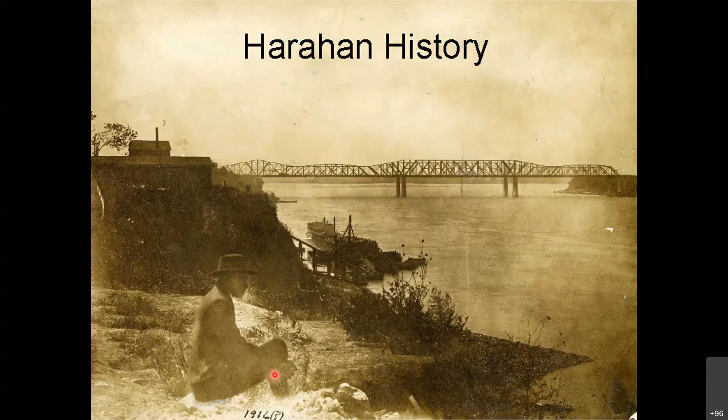This is a historical perspective—pictures dated about 1916. You're on the Tennessee side, looking south, and you see the two bridges. The bridge we're talking about, the Harahan, is already complete; it's the bridge closest to us in this photograph. The one behind it is the Frisco Bridge.

Here's the Frisco Bridge. It was built quite a bit earlier, in 1892, and at the time was the third longest bridge in the world—amazing when you consider its length is just about a mile over the waterway proper. It was owned by one railroad and was a single track bridge, a very busy place. They said before this bridge was built, it took 2 weeks to get a train across the river. They'd roll the cars down long inclines on the Tennessee side, put them on a barge, float them across the river, and reassemble the train.

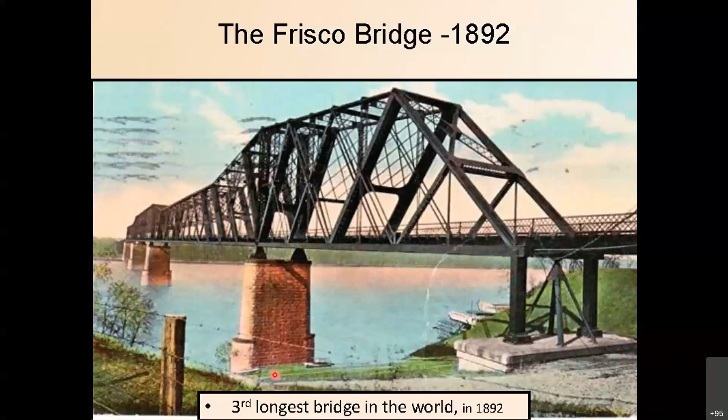Even with the one crossing, by 1910 it was getting crowded again. There were now 5 railroads coming into Memphis and 2 coming into West Memphis. Frisco had a monopoly, and a bunch of other railroad companies formed a group and decided they wanted a second bridge across the river at Memphis.

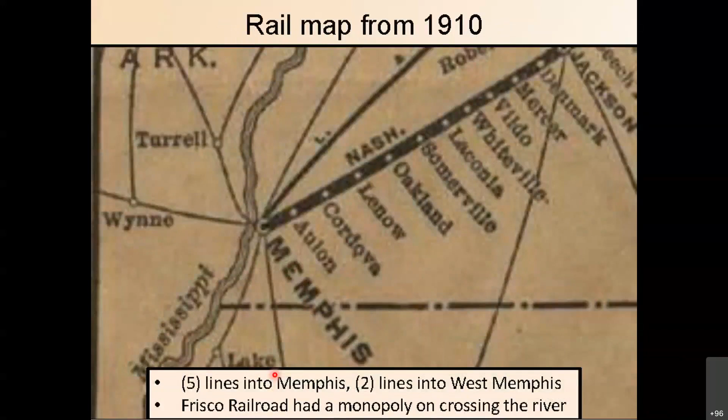By the way, this bridge will have—what happened? Page down is not working here.

Well, oh, there we go.

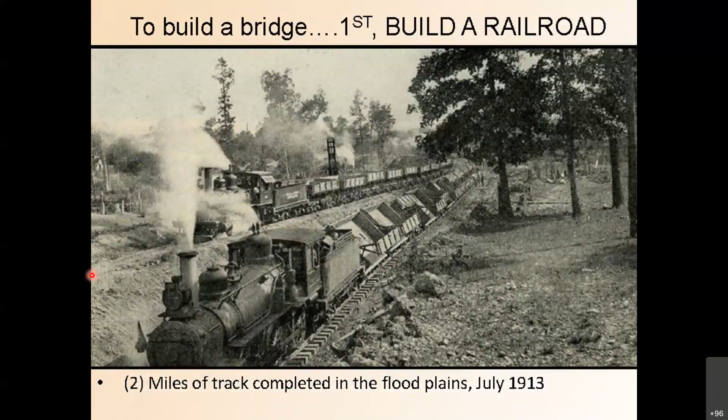The first thing they did when they got the commission to start the project was to build a railroad track. They needed 2 miles of track to get from across the floodplain in West Memphis to the edge of the water. This work was started in July of 1913, so they got the project approved and the track built in 2 months. I can't imagine those dates are complete - either that or Mr. Modjeski had started designing the bridge before he got the assignment. Anyway, here's what he was trying to do. Let me get my pointer up here for you.

Here's the railroad we were just talking about. It came off existing tracks, came across the floodplain, terminated at the water's edge. There's a pier they built there - the foundation of that pier is still there, you can see it today. Here's the bridge on the right-hand side; the upper right-hand side will be the Harahan, the Frisco is down below it. They're similar lengths, and of course their substructures had to line up because we're in the river - we couldn't have piers that were not aligned to each other.

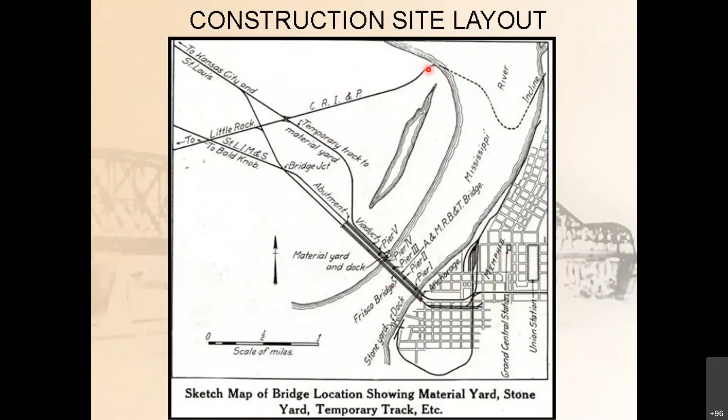And then you see the rail yard going into the city where all the train stations were, down in this area. One interesting fact - even when this map was drawn, you see this incline up here in the upper right corner? That's one of the inclines to get the trains down to water's edge, and then brought them across to the Arkansas side of the river, reassembled the train, and continued to the west.

So we're going to go through a couple of these historic pictures. They built 15 barges in 3 months to build the bridge. They needed 21 barges in total.

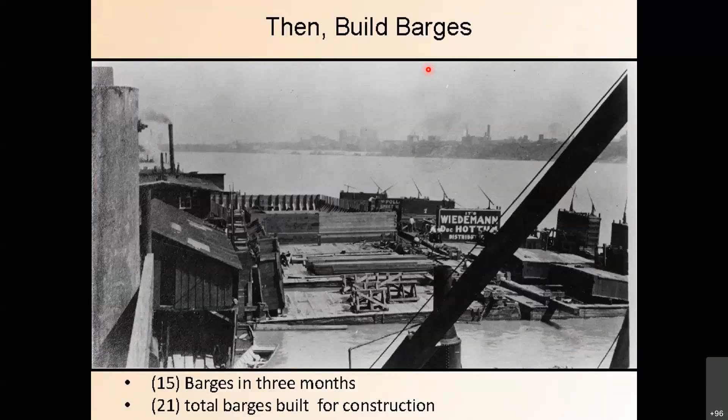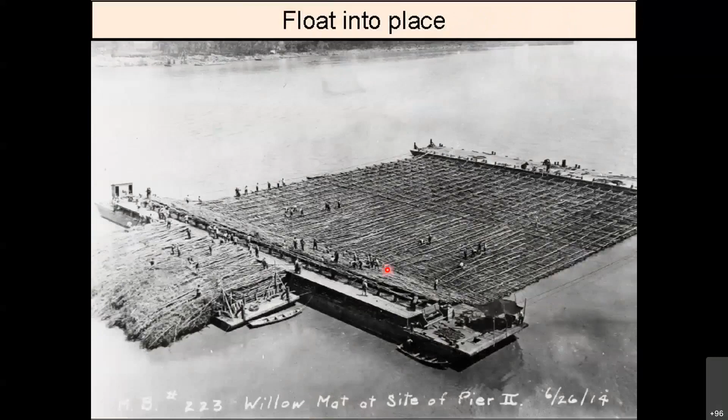You see the laborers are constructing willow mats that are going to sink to the bottom of the river. This is a different picture of it, assembling the mat. You get an idea of the scale of this thing when you see the workers and the boats around them, and the finished product. Now we're moving it into place.

There's pier number 3 - again, we're working on pier 2. The mat is being brought in. This picture is probably taken from the structure of the Frisco Bridge itself. They're getting ready to sink the mat into the ground.

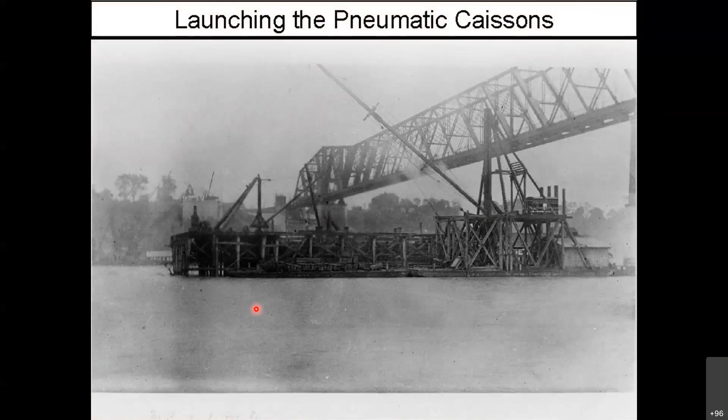The bottom of the river is a very fluid environment. It is not stationary - there's something called bed load and something called suspended load. Bed load is the river dragging the bottom of the channel, if you will, down to New Orleans. It is a very dynamic situation. The purpose of the mat was to keep the river from moving around the foundations as they constructed it.

If you want some more background on working under the water on the Mississippi, I would suggest a book called Rising Tide by John Barry. It is a great read - it actually gives you quite the history of the Corps of Engineers and the Lower Mississippi River Commission, and all the bridges, and James Eads. It's a great read - it'll surprise you what they had to put up with.

Anyway, they got the mat in the ground - it's been sunk. They're now starting to install the pneumatic caisson. These are big steel boxes, stone boxes, 4-sided, 5-sided box. They got the lid on the top, the bottom is open, and they start digging their way down. Here's another picture of it, getting positioned.

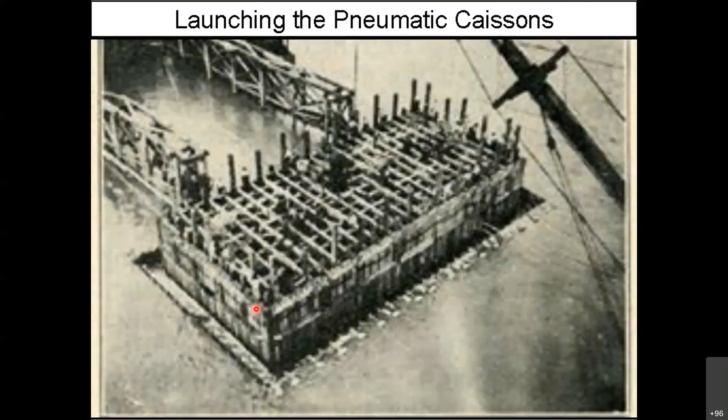They dig their way through the river bottom. They put men in the bottom of this thing - sand hogs, they call them. It is under pressure, they dig out the material, and it is lifted through a series of air locks out of the top. And as this thing sinks into the ground, they build the pier on top of it.

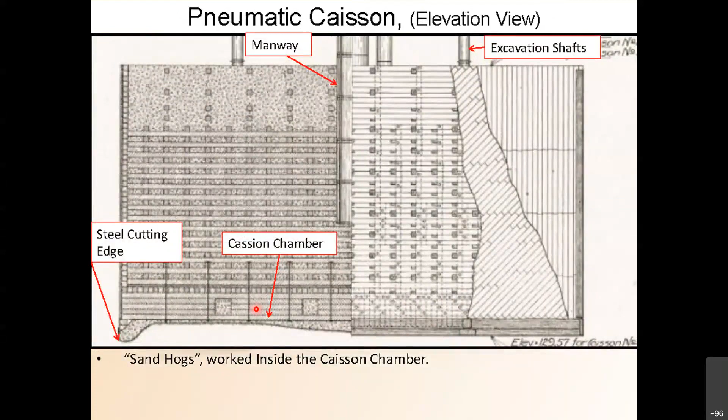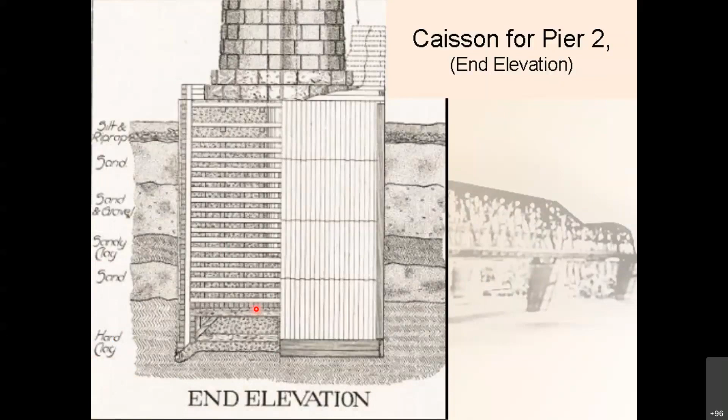Now, these drawings come right out of the Harahan construction plan set - these are the things that Modjeski's firm actually produced. You'll note there's no rock at the bottom of that pier - there's no rock in this part of the state of Tennessee. It's 1,500 feet down; they went down to good hard clay. I do not have the elevation, but it's quite deep into the sediment of the river. And then the stone pier is coming out of the top of it. This again is pier number 2.

One of the anchors, or piers—pier number 1, on the Tennessee side—was not meant for compression. It was meant for uplift. I'll show you why in a minute, but look at the statistics across the bottom: almost 11 million pounds of dead weight designed to withhold a 7 million pound pull.

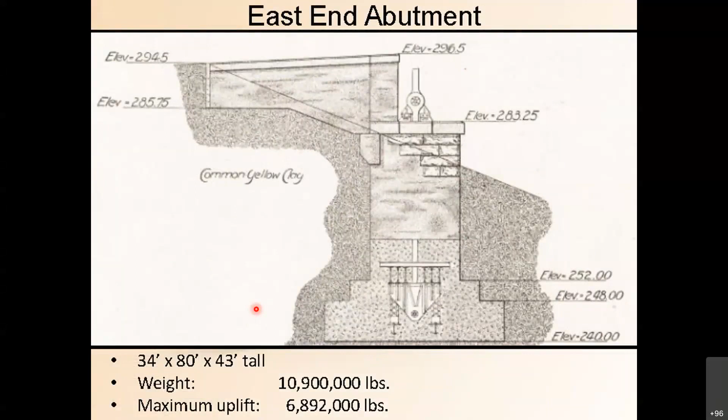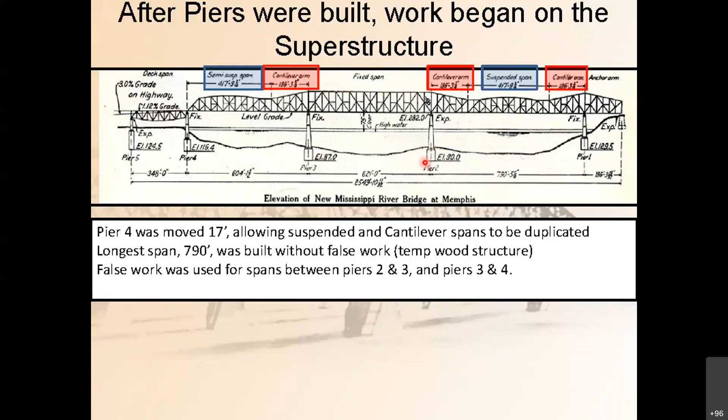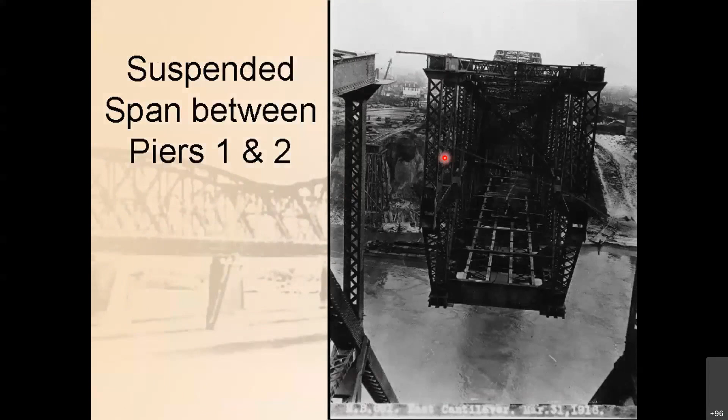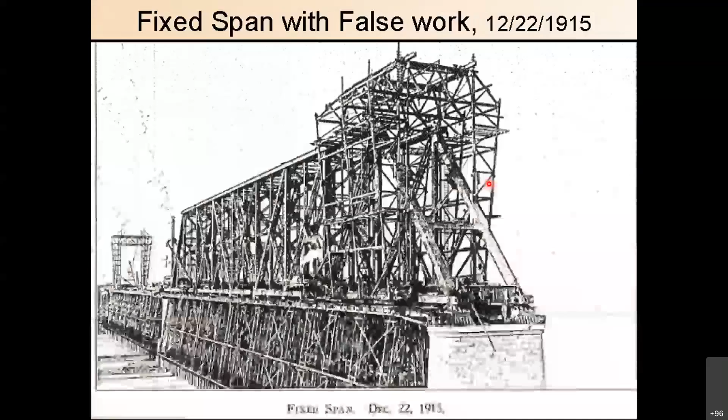They're working on getting ready for the suspension section. Here it is—they're making the connections. They lifted it up and they're putting it into place. Here's the false work between 2 and 3, and then there's the stone here for number 3, and then there's the false work between 3 and 4.

You can see, and this looks to be a rendering to me, the superstructure of the truss in the background getting put together. But we're in the river.

We had a problem in 1915—a big flood came through and we lost all the false work between the piers. You see it's knocked out. It knocked the span 8 inches out of alignment that was already constructed. Totally destroyed between piers 3 and 4.

Pier 2 is in the background. Between 2 and 3 is here. Between 3 and 4 is here. We lost all of that false work and the superstructure that had been constructed—had a pile of rubble.

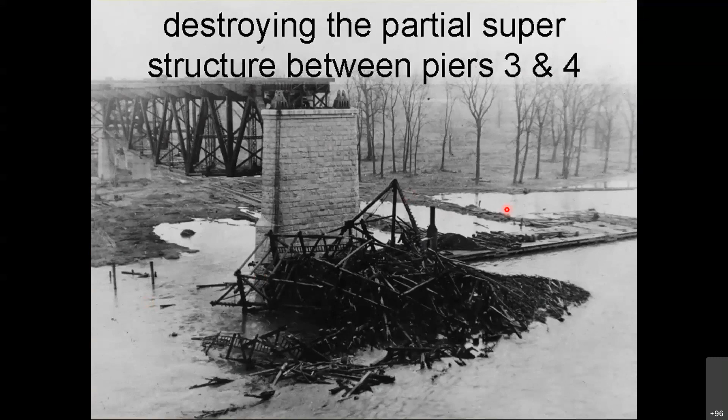Here is the dock I mentioned earlier. The materials were brought out on that dock. Remnants are still there, believe it or not.

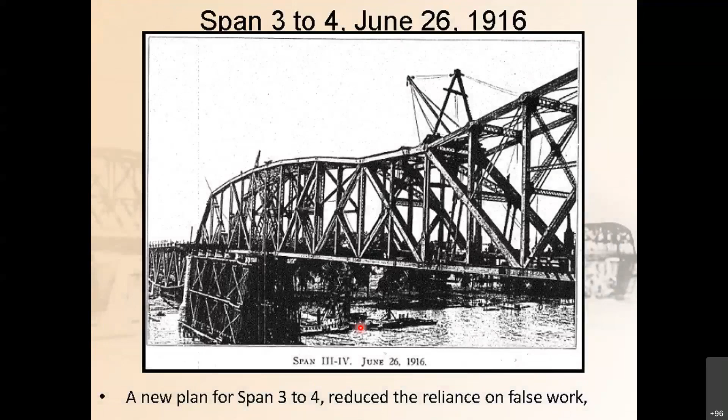They redesigned it a little bit so they had less false work, came back, and rebuilt all the pieces that were missing. In July of 1916, about 3 years later, they were done with the project for the trains, with 2 tracks on this structure. That's a construction period of about 3 years to build that bridge—from July of '13 to July of '16.

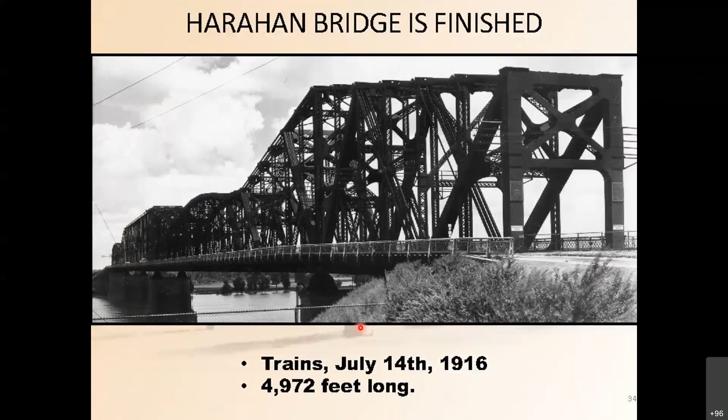About 14 months later, they finished what was called the wagon ways. At the time, there were about 1,000 cars in this part of the country, so traffic wasn't a problem, but there were wagons, actually illustrated in this picture. There was a wagon way on the north side of the track and a wagon way on the south side, one way in each direction.

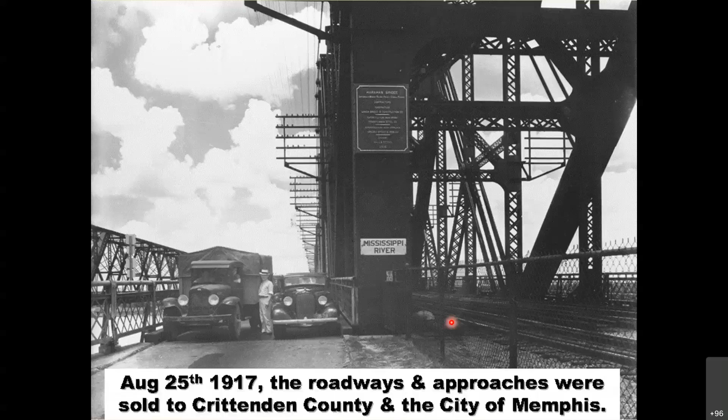On the 25th of August in 1917, a very significant thing happened. The railroad sold the wagon ways to Crittenden County, Arkansas, and the city of Memphis. They didn't do this out of benevolence. They were told to do this by the U.S. government as part of their permission to build the bridge. They would build these wagon ways and then give them to the local governments. That's a very important fact that made our project possible.

The wagon ways, converted to roadways, served as one of the very few highway crossings south of St. Louis until you get to New Orleans, until 1949. They did make the roadway a little wider. It was 14 feet when they started. They got it a bit wider, but it's still a pretty narrow way.

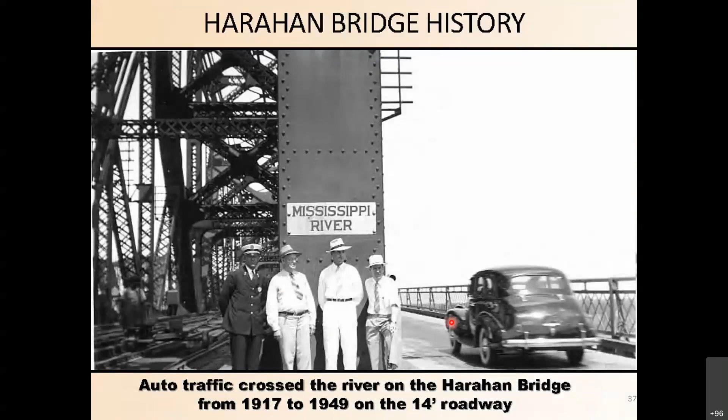That brings us to a more current time. In the 1990s and 2000s, there were several ideas to repurpose the automobile pathways. This whole idea of rails to trails was getting to be a bigger idea - that we would walk out and look back over the city of Memphis. The best view of the city of Memphis is from the middle of the river, looking back to the skyline. They tried several different ideas, but one of the biggest problems they always came up with was money and getting this thing going.

Well, one guy took this upon himself to make it happen - Charlie McVean. Interesting fellow. His father, as I understand the story, worked for the Corps of Engineers. I don't know that Mr. McVean Sr. was an engineer, but I think his background was there. But Charlie himself was self-made. He started McVean Trading & Investments, trading commodities.

He took it upon himself to get this project built for the city of Memphis. He's a railroad enthusiast. He's a philanthropist.

I've been in his office. He has a model railroad train running above all the offices on suspended tracks he hung from the ceiling. He puts GoPro cameras on the train and drives it around the yard, around the office from time to time. He's a nice fellow, got a lot of money, and he likes to share with what he's got.

Come to find out, he trades cattle. A lot of the cattle companies have offices in Omaha, Nebraska. The UP Railroad, who owns the tracks on the Harahan Bridge, has their corporate offices in Omaha, Nebraska.

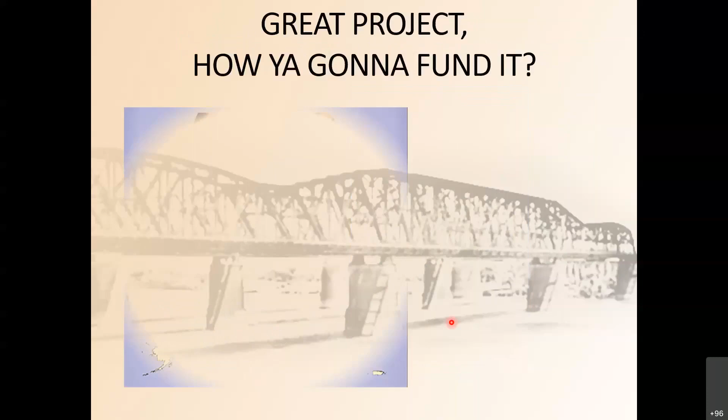Everybody got together. They formed a coalition of two governments, two cities, and a big project, and they decided they'd go for a Tiger Grant. Tiger Grants are extremely difficult and competitive. In 2012, there were 703 applications for Tiger Grants, with only 47 awards - a success rate of just under 7%.

Memphis got one, which is amazing to start with. Memphis got exactly what they asked for - $14.9 million. Unheard of, to get the amount of money that you requested. But we now had a project, and we now had money. So this is about the time I got involved in the project.

They got the grant application in March of 2012. They got the grant terms back in December of 2012. They had to have the design done by May of 2013 - they hadn't started yet, but they had to have it done in 5 months. And they had to be under construction no later than the end of the year or they'd lose the grant. There's no wiggle in that statement.

So they had a grand party, I understand, the day they got the award. And then the next day, in the hangover, they realized, oh damn, we've got to get busy. That's when I went and hired my company to start managing the project and start hiring the design teams and moving towards construction.

Uh-oh, wait a minute, that's not right. Wrong button. Hold on, let me get back to where it was. Hit the end before I got there.

Okay, so I was hired as a program manager. As I said earlier, this is the funnest thing I've ever done. It is not the most technically challenging, it wasn't difficult to get through, but it was more fun. It was a project that was very popular. There was no opposition, everybody wanted to talk about it. The media came out on a regular basis and wanted tours. I led people all over this place. Even before we opened it, we were going through construction sites with various PPE equipment. It was just a fun thing to work on, but it had some real challenges.

Client management, funds management, and record keeping were big deals I had to deal with up front. Client management, I had two of everything. I had the Federal Highway Administration, two cities, Memphis and West Memphis, two states, Tennessee and Arkansas, two county governments, Shelby County and Crittenden County. I had Tennessee DOT, the Arkansas DOT, and MATA for a portion of the project. And then, of course, the railroad, which is the 500-pound gorilla. There were a lot of people that wanted reports, information, and coordination. This was a difficult thing.

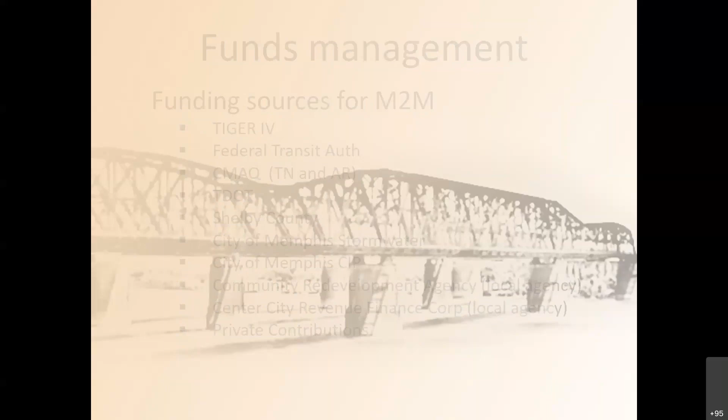Funds management - this is where I spent many hours every week. There are 11 lines on that screen, and each one gave us money, each with different sets of rules. Some you could use for design, some only for construction. Some you could use in Arkansas but nowhere else, some in Tennessee but only on one segment. Some of it was private money, and there were a couple of taxing agencies in there too. This is where I spent a great deal of time trying to keep the budget balanced or managed. There's $40 million on this table in this list of people, and they made it more complicated for me. There were 11 colors of money - that's the term we use, 11 colors of money.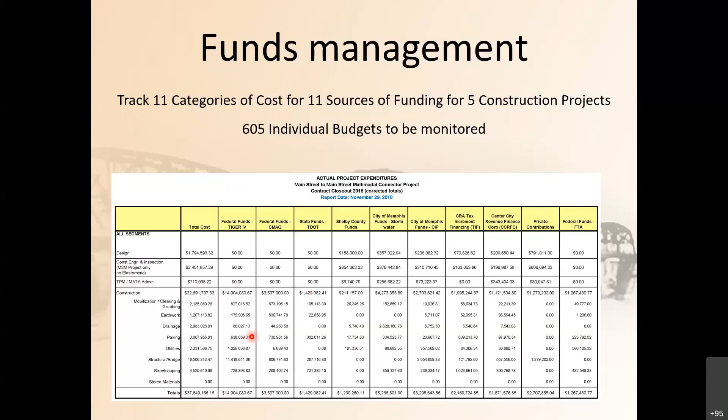They divided it into categories of cost - 11 categories total. 3 were soft costs: design, CEI, and program management. The other 8 were items of construction, which are down along the left-hand edge. Let me highlight that for you. On this edge I had to keep up with each one of those categories. And then I had 5 different construction projects going at the same time. So 11 times 11 times 5, that's 605 individual budgets. Now, a couple of them were zeros, but each one had a budget. And this is a summary - there are 5 more spreadsheets deep going into this. This was a lot of work. It really was.

Record keeping - TIGER grants are notoriously record generating grants. Quarterly reports, annual reports, regular federal highway project reports. The Bureau of Labor Statistics heard about our project, and I had to report to them every month how much money we spent and how many jobs we created. Of course, TDOT had their documentation. This was handled like a local project, so all the funding sources needed documentation, and then all the electronic and paper document retention policy. I did some checking - there are 30 file drawers full of paper in the storehouse here in Memphis, a quarter of a terabyte of data on jump drives, actually bricks, and 60,000 individual files being stored for this project.

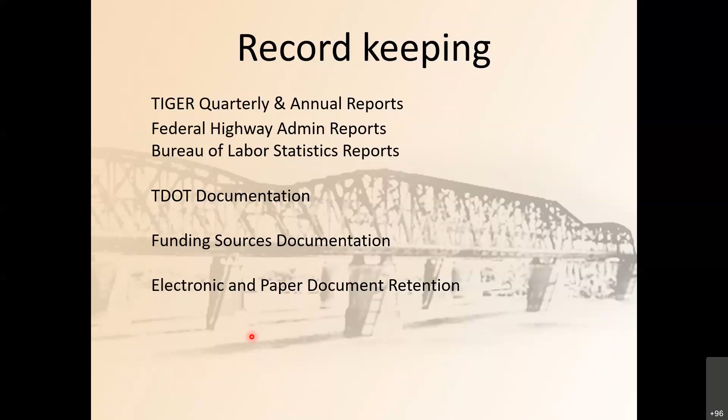Let's talk about what we started with. Now I'm going to start drilling down a little bit. This is what it looked like when I walked up there in 2012. Main to Main was a large project, starting up on Memphis Main Street on the right-hand side of the screen, crossing the river and going many miles into Arkansas. We're going to quit talking about everything except what we called segment 4, which is right across the river. And there we are - the blue line represents the walkway that was built under this contract. It's across the river.

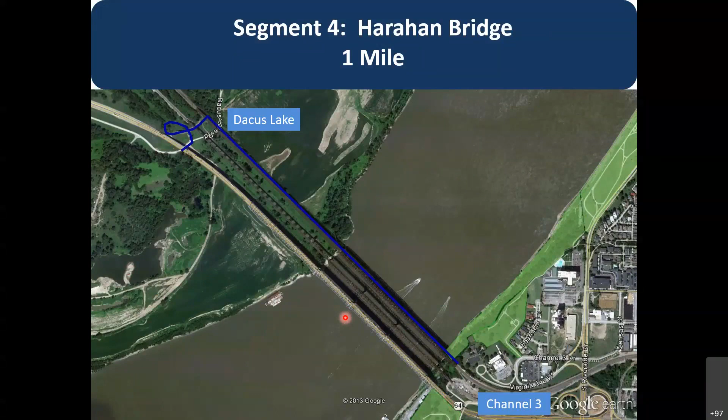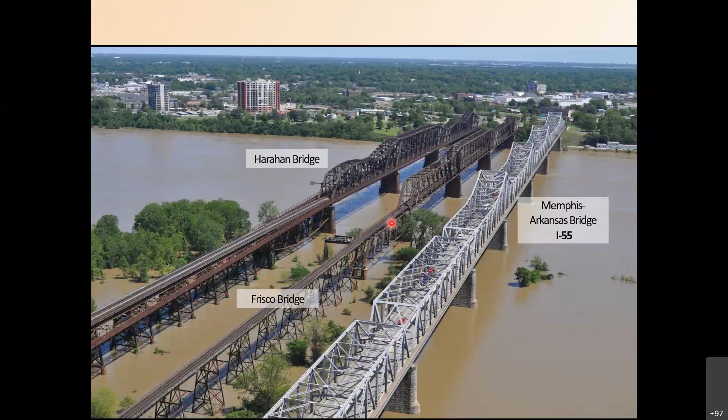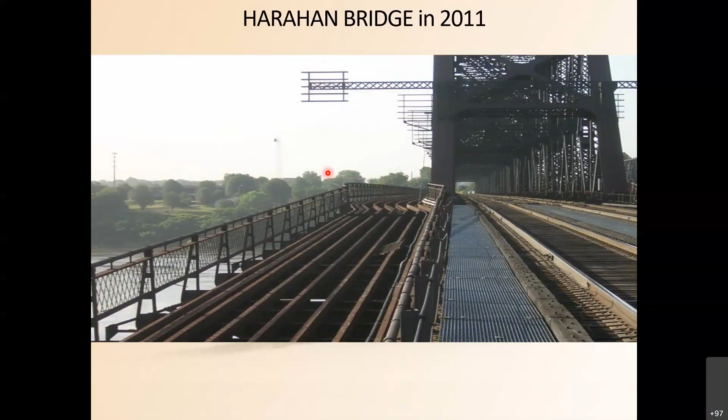There's what it looks like right at the west portal of the Harahan. I'm in Arkansas looking back to Tennessee, track 1, track 2. Here's the walkway we're going to be constructing on. Notice a little wiggle here - that causes a little grief, just a little shimmy as it went around the edge of the truss. This up here was part of the original telegraph wires that brought wires across the bridge back in the early 1900s.

Here's the bottom of the incline. You were standing up there with the previous picture, now you're down at the bottom. You're about 3,000 feet away. That incline is 3%, which is ADA compliant. Lord, no, we didn't know we were going to need that at the time in 1916, but we got it.

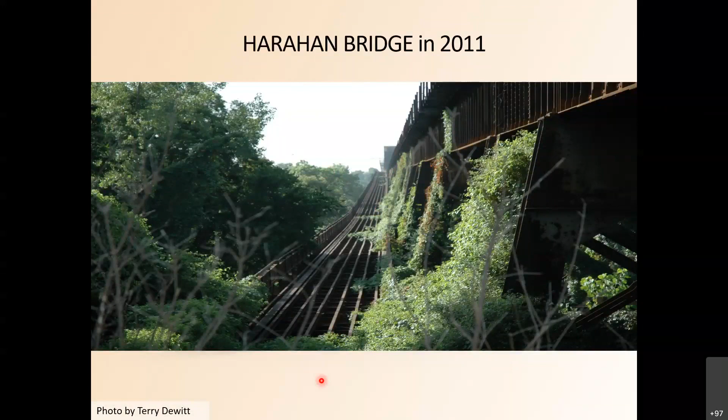Of course, you see the overgrowth that's happened. There's been no maintenance done on the walkways since the road beds were pulled up in 1949. As you exited the Harahan on cars back in '49, you went on some concrete structures. In this case, I'm standing on the Harahan Bridge, and this bridge right here is the Frisco. The cars would come down, merge into a 2-lane road, and go under the Frisco and over to what is now I-55. This was all blocked off and abandoned in 1949.

Now, let's talk about the challenges for the design of this project before we get into the actual project. First, we had the State Historic Preservation Office, and we had some utilities, some framing issues, and a lot of security issues to deal with.

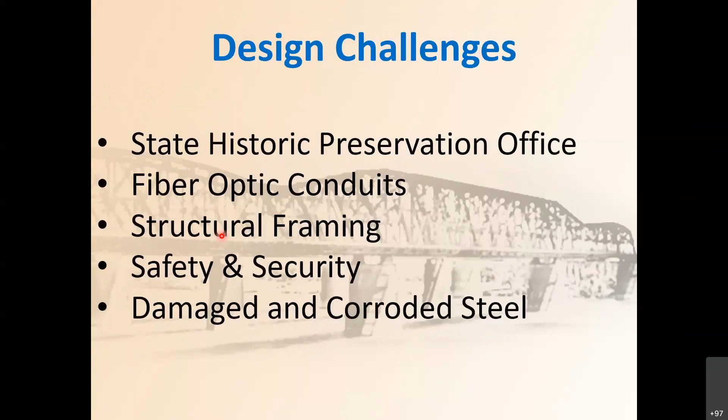SHPO, City Historic Rail, it was put up in 1916. Somebody wanted to take it off - it is very heavy rail, and we were very weight conscious on our project. It's not OSHA compliant anything. Here's the rail sitting right there. Some people thought it was ugly, wanted to take it off. First of all, I liked it - I was not one to want to take it off, but I was not the deciding factor. Actually, the state of Tennessee was the deciding factor, and they said you're going to keep the historic rail.

Fiber optics - we had 3 of them. This is the picture standing in Tennessee, looking to Arkansas. See 2 large conduits right there at the base - zoom in, they're 4.5-inch steel conduits. One belonged to MCI, one belonged to Sprint. The entire eastern and western paths of our country's communication went through those 2 pipes - at least that's what we were told. Now, I don't know how true that is, but they warned us we could not damage them or move them. We certainly didn't have time to move them or budget to move them, given the tight considerations.

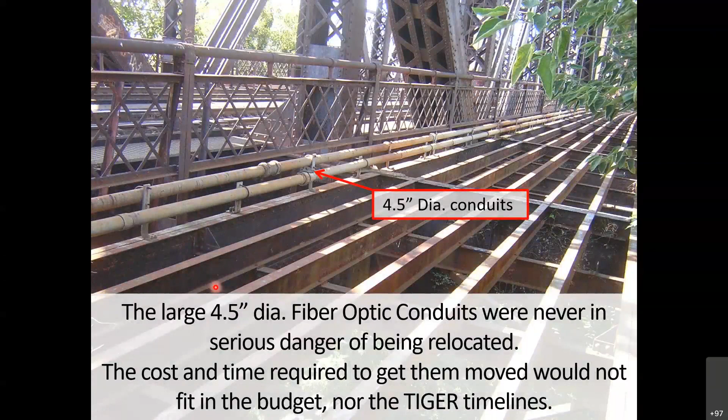AT&T was in the scene too. There's a much smaller conduit down in the structure proper. This was sometimes in conduit, sometimes went overhead as a cable - I don't know why, but we had to deal with that. That one we were able to move out of the way, we just kind of nudged it so it wasn't in our immediate construction.

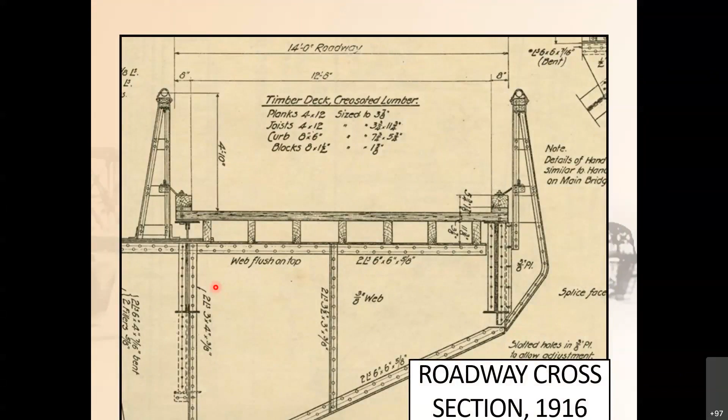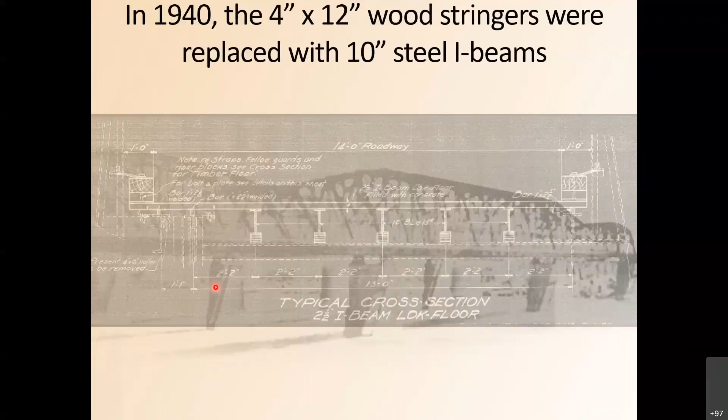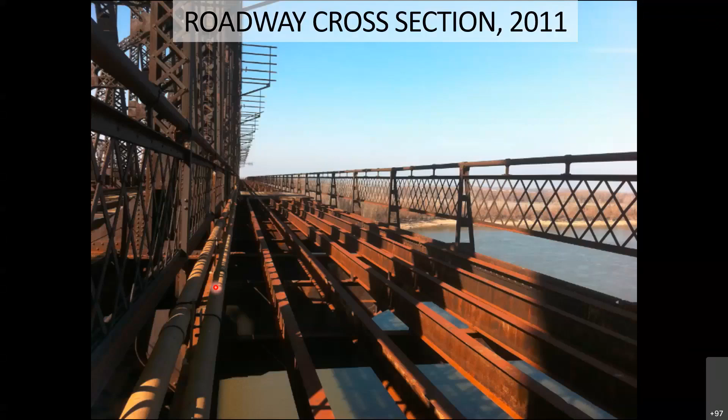Okay, structural framing. I got to pick up the pace here. This is what the roadway looked like when we got there in 1916. They expanded it out and made it a little bit wider - there's the bracket there. They replaced the wood with steel. 1940... 1949, they quit taking traffic, and they took the deck off. This is what we started building with when we got there in 2011. This is what it looked like for us.

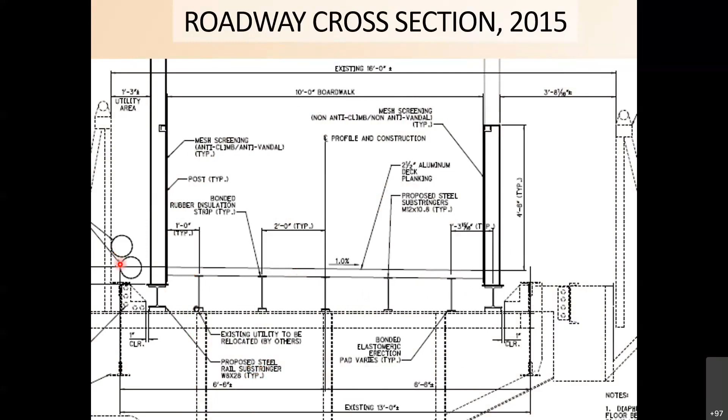Here's our solution - existing structure here. There's a gusset or a bracket about every 20 feet. We put steel stringers perpendicular to that, a walkway on top, and railing on the side. You see my utilities are tucked here out of the way, and there's AT&T, just bumped out of the way of that stringer. Here's a little better picture of it right here - you can see.

Safety and security - lots of worry here. Railroad security, pedestrian security. Homeland Security was very concerned about this bridge. We wound up putting in cameras, pull stations, and lighting. We had to protect pedestrians from objects falling off the train, and from falling into the river. So: cameras, security, lighting, and emergency pull stations.

They want an 11-foot high fence on the railroad side, and we need a 54-inch high fence on the river side.

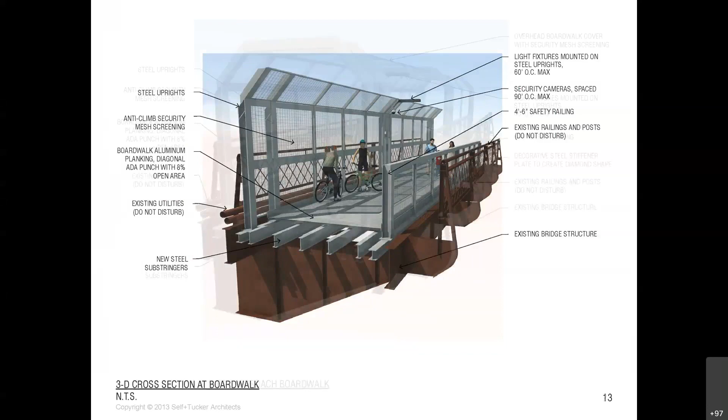Let me give you some ideas of what it looked like. This is kind of what the structure looks like - these are models we built. All the stuff in aluminum color is new; the stuff in copper is existing in these pictures. On the inclined walkway, we had to put a roof on top so if things fell off the railroad car they wouldn't knock somebody out. We proposed to use mesh as we first got started.

Here's a mock-up of the lighting, the camera, and the call station as we conceived it in the design process.

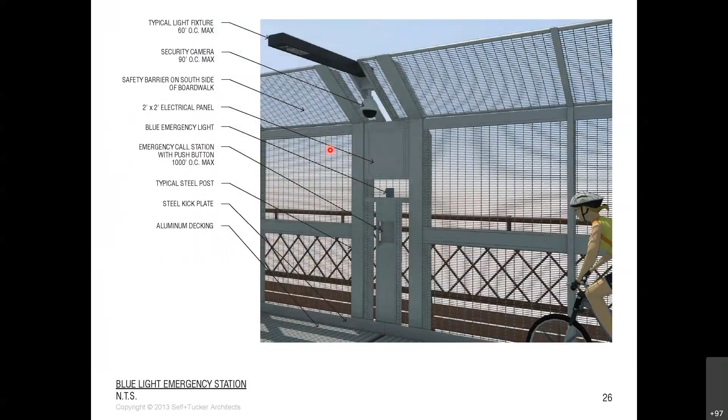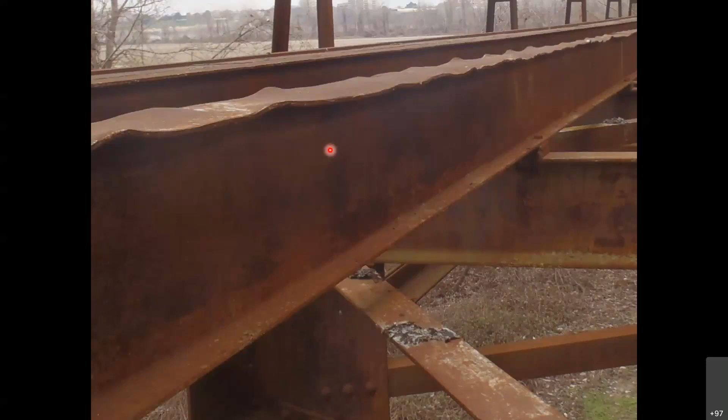We'd love to use the old steel left there back in 1949, but when they ripped off the deck, you see what they did to the top flange - it made it garbage. We had to throw it away, scrapped it out.

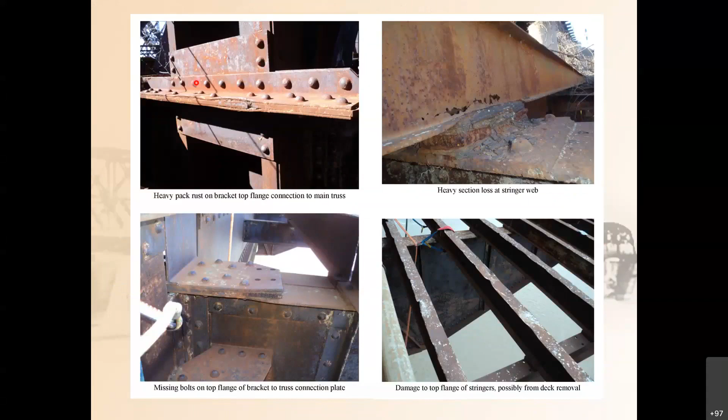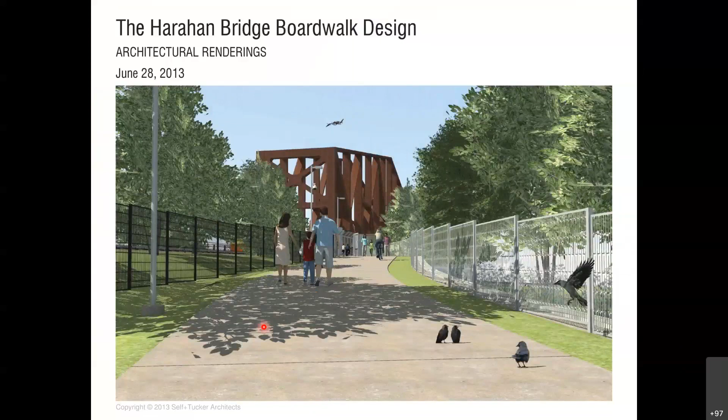I'm just going to walk through these quickly. These are the drawings we put in the plan set, but they're easier to understand in the actual plans and sections, so let's just walk through them quickly - Tennessee side, headed across, walking to Arkansas.

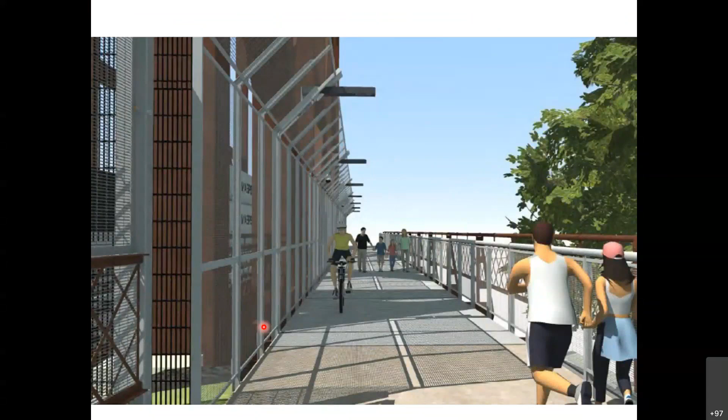So we step out off of the anchorage, head out over the water. This is what it's going to look like. Notice we had to keep it very straight - this was a big deal during construction. Notice I had an overlook there; we built two of those, a spot where you get a slightly wider part of the road, if you will. The walkway is only 10 feet wide - that's all we could manage given the weight limitations during the initial design.

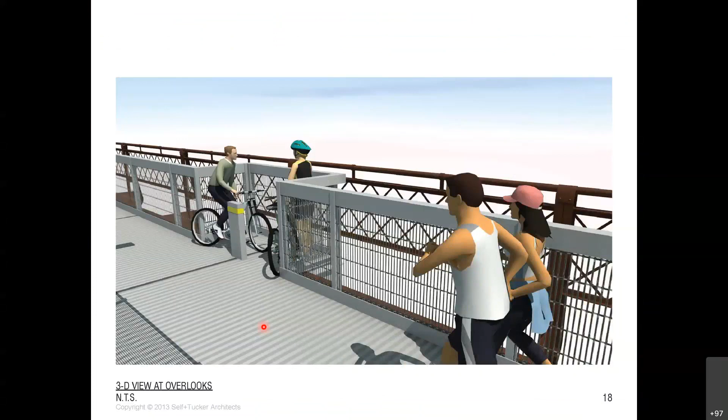Different perspective - the incline portion has a similar cross section, except we had a roof on it. We got to the far end into Arkansas. We had trains on top, pedestrians on the bottom, so we needed canopy structures to protect our people from things falling on them. That's the Harahan undercrossing.

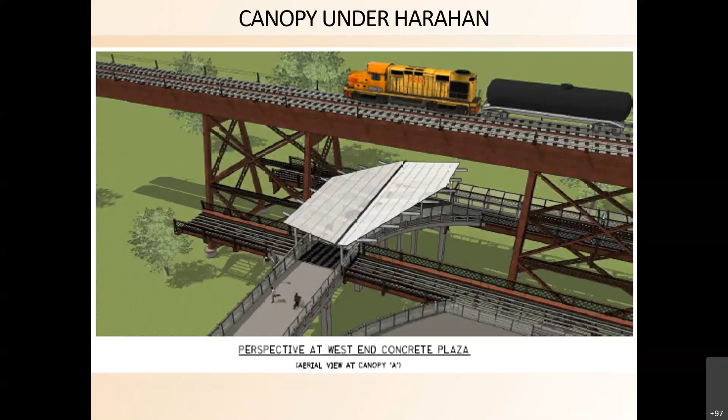Similar problem going under the Frisco Bridge - we built a second one there. That's the old concrete deck I showed you a few minutes ago; that was the exit roadway. We turned it into a respite area and a trailhead on that end.

So we had $19 million in the budget. The engineer said we could get it for a little under $17 million. Those were my two bids - I only got two bidders. I think bidder one was a courtesy bid. Bidder two was $2 million over my budget. I had a real problem, and my construction deadline was looming quickly.

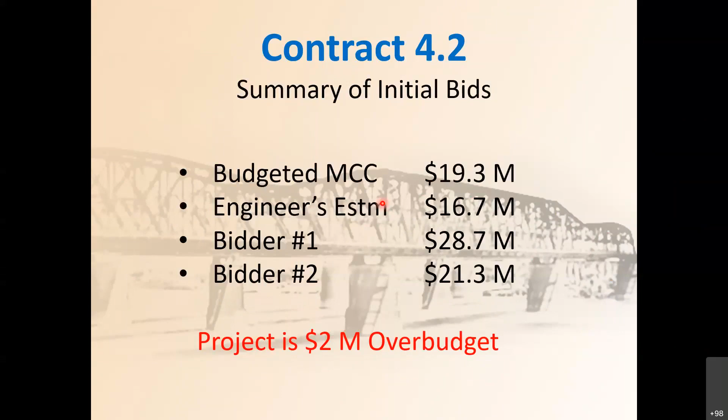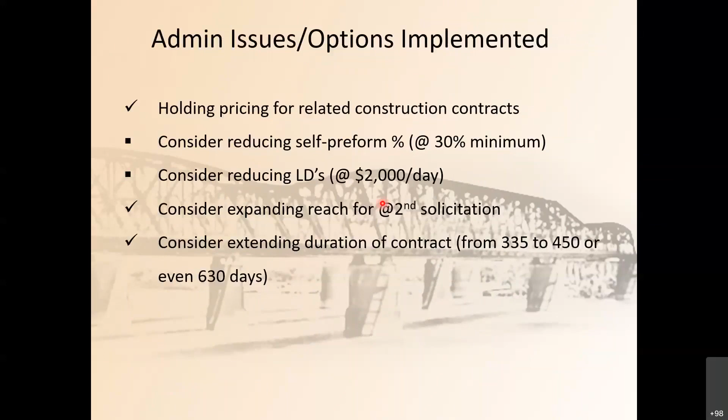Initiation of construction - we had to make decisions, so we decided to rebid. There were some issues with rebidding: we had to get prices held, and we considered changing some other parameters. We talked about expanding the reach and extending the construction duration. These were all issues we were fighting our way through. We wound up accepting all of them, except that we kept a 30% minimum for the GC and kept the LDs at $2,000 a day. We did extend the construction to 450 days total.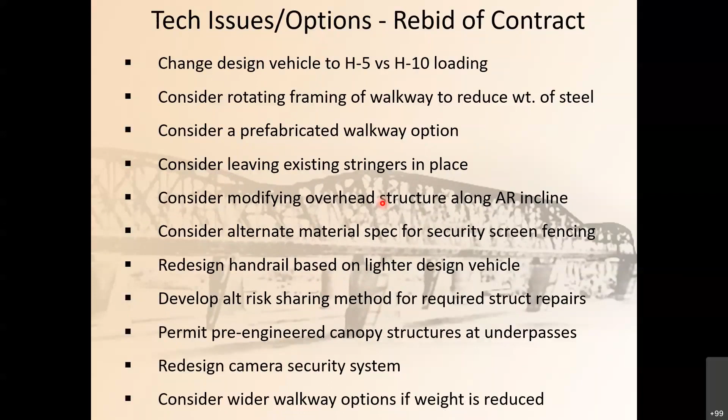On the technical side, these were all kinds of issues we had to deal with. We decided to change the design vehicle from H10 to H5 - that went from a small pickup truck to a gator. We considered rotating the framing for steel reduction, which was a big savings. We considered prefab options, leaving stringers in place, different methods of risk sharing for structural repairs, and redesigned the camera system - just some of the ideas. We wound up accepting all of those, except for the alternate material for the fencing; there was no other way to do that. That was the only option we had.

So here's what we did for reframing. This is what we did originally. We had stringers across the bottom, everything built in place out of component pieces.

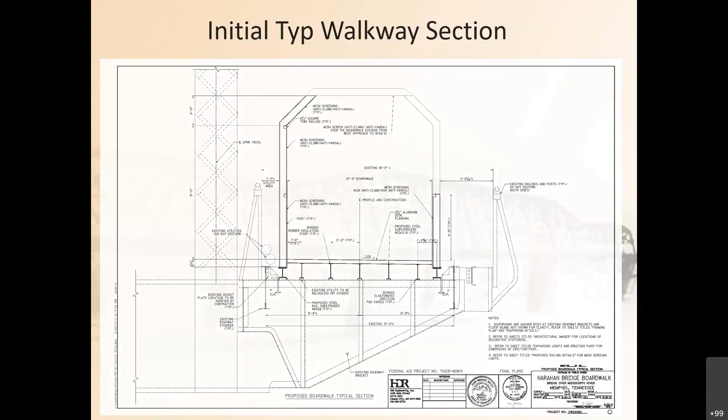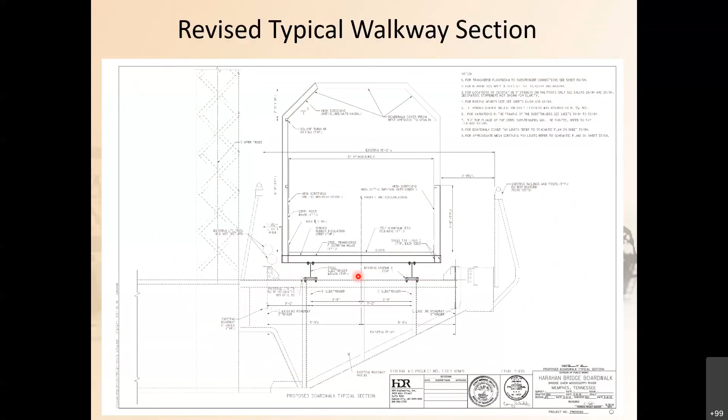We turned the framing the other way. We put the stringers going this way, and put additional beams, just two, running perpendicular in and out of the page. That meant all the existing steel, which is omitted for clarity, is sitting right there. The old stringers are sitting right there. We took out my utilities here and there, but we lifted everything up and turned it a different direction, which greatly reduced the amount of steel we needed on the project.

We also identified that we could maybe go wider since it was not as heavy. So we took three alternates: a wider walkway that was prefabricated, a 10-foot walkway out of component pieces like I just showed you, or a 10-foot walkway that was prefabricated.

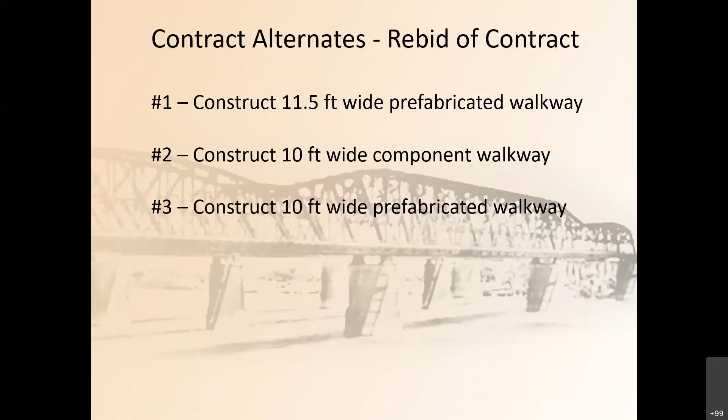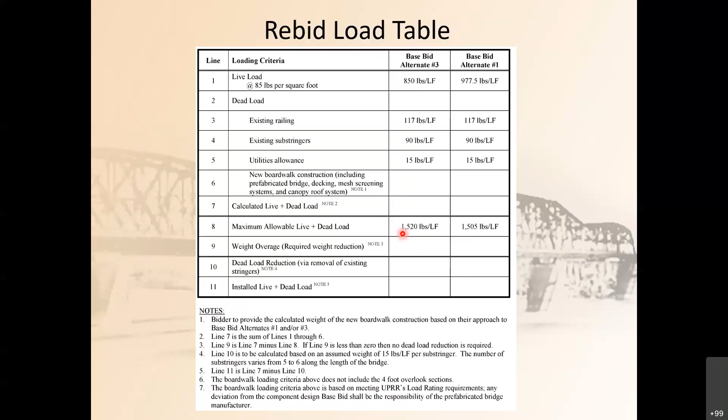We could play with the extra weight that we had involved. So the base bid was designed on alternate 2, the 10-foot stick construction. But if you went with prefab and it was lighter, you could make the walkway wider, up to 11.5 feet wide. If you went the other way, your live load's the same, but you'd have to take off stringers to get it to weight. At the end, you can't weigh more than 1,520 pounds per linear foot with your construction. This table helped our bidders decide which way they wanted to go when they rebid the project.

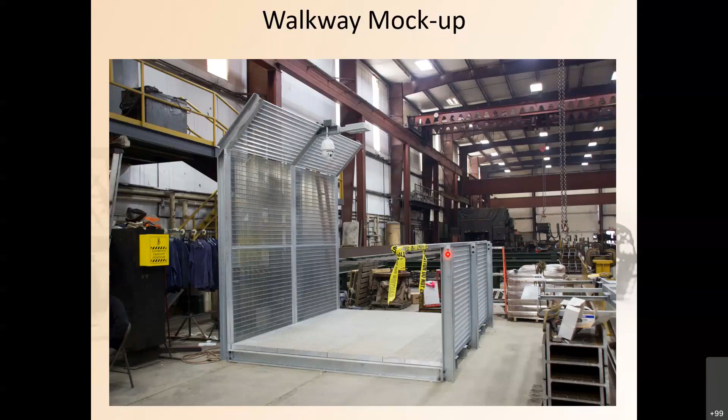We walked through it. These are close-ups of the different parts. See the walkway there on the right side and the holes. Ideally, that planking would have been turned 90 degrees, but it didn't work for us in our framing option. Notice the perforations—that's to keep the water off, and it's got a real rough finish so nobody slips, because it'll ice up in a heartbeat out there.

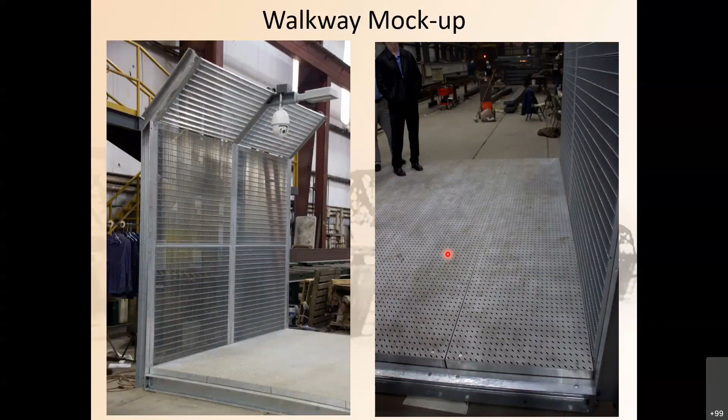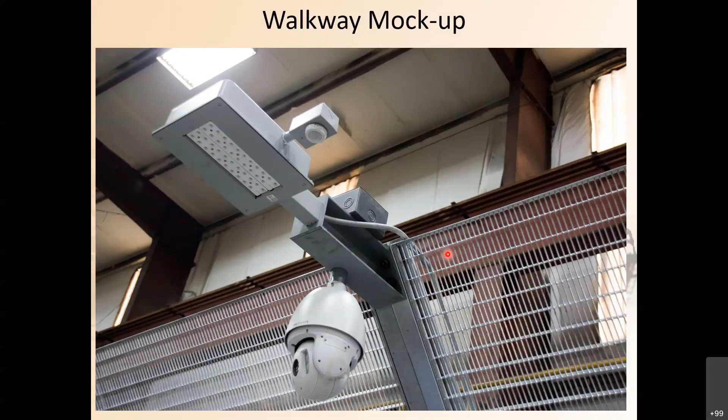This is kind of how we want everything to look. We want to check out all the devices—you see the light there, the camera, the junction boxes, the photo sensor, and a prox sensor right next to it. We checked everything out, including how we route the conduits and how we fasten them. We wanted everything addressed in this mock-up.

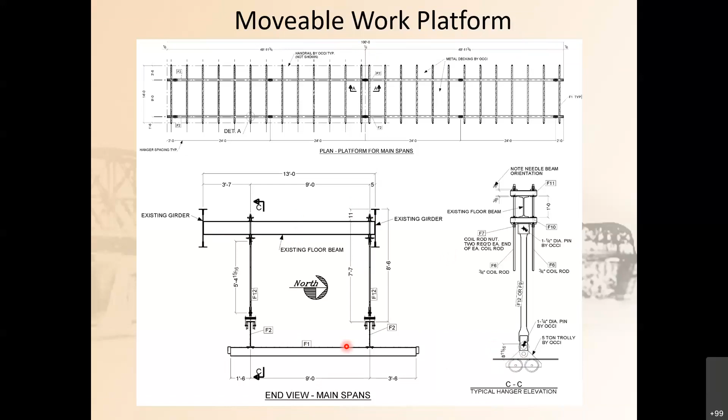The best idea he had was he figured out he could pre-assemble the component work and drag it onto the river. This is what really made it work. He built a yard. The spacing of those concrete blocks is the same as the brackets on the bridge over the river.

There's my utilities again. He would drag up 80 feet, two 40-foot sections. At times, he got up to three 40-foot sections. And he would hook a cable to it and drag it 2,200 feet to Arkansas. He drug first two, next two, next two. So most of his assembly work, including all the electrical conduit within the 40-foot or 80-foot reach, was pre-assembled before it ever left the ground.

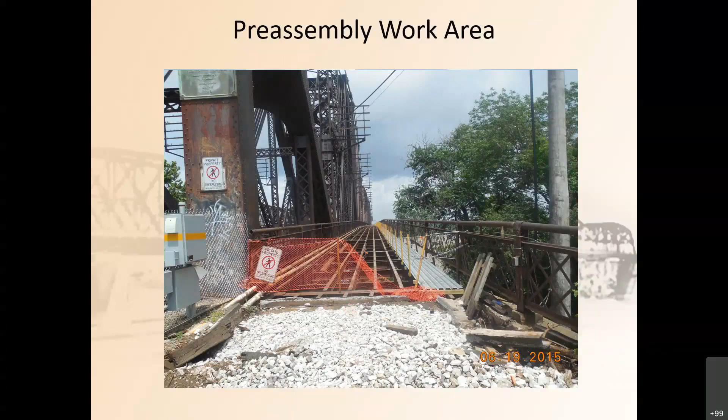A little hard to see on this one, but there's the first 80 feet of our walkway on the far Arkansas side. That's the day they pulled it. The first day took a long time to get there. They got better as they got after it.

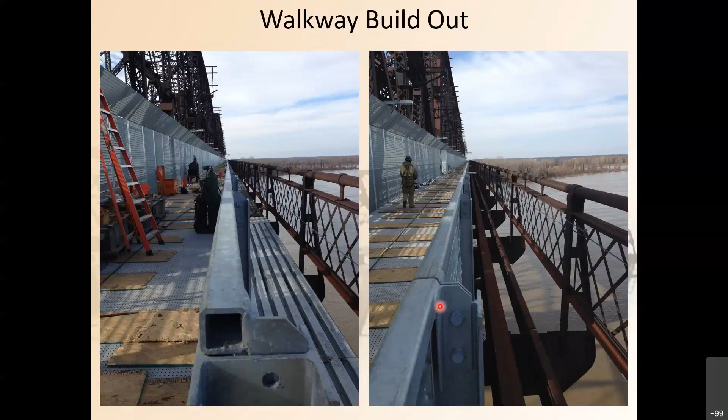Here's the walkway in place. This is a joint. Notice here how they left it. Here's what it looked like when the next piece was pulled in behind it. And they just walked themselves from Arkansas back to Tennessee. Now, when they got over the Arkansas floodplain, they simply picked it up with a crane sitting on the ground, and it was much easier to go with.

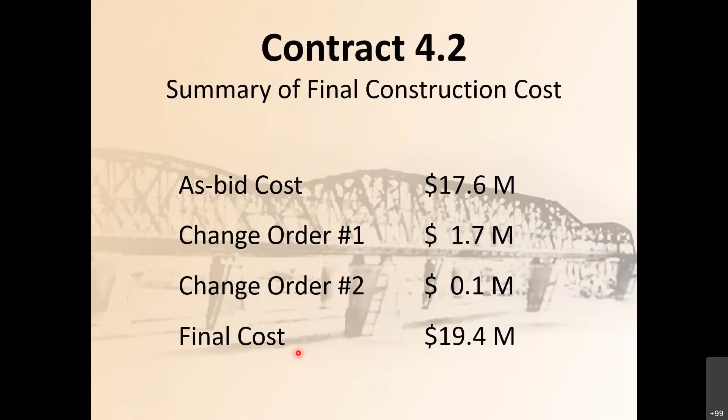Finished product. We're proud of this. I do not have statistics, unfortunately, but you get several hundred thousand people a year using the facility. You see it's 10 foot wide. Notice the effort we made to keep everything straight. We told the contractor, it's like looking down the barrel of a rifle. You can't see any misalignment. It's got to be just perfect. And they worked real hard to get us there.

One last thing that happened, right at the very last 6 months of the project, a different philanthropic group decided they wanted to light the bridge. There are some 100,000 points of light, all LED, multicolored, 3-color LED, across that bridge. There's a series of bars of light, 1, 2, 3, 4. And this is the product that we ended up with.

There are 13 astronomical events. There's a light show every night, I think it's at the top of the hour and the bottom of the half hour. The companion bridge, the I-40 bridge, which is a couple miles upriver from here, has also had lights installed on it. Similar light patterns, and every night we have a light show on the river in Memphis.

And that's kind of the end of the presentation.

Do we want to try and do questions at all, Jennifer? Yes, we have got approximately 8 minutes for questions. So good job and fantastic job on working around your technological issues. You probably still haven't had that fire drill yet. We still haven't had that fire drill yet. You're right, I'm looking in the back parking lot and there's no fire truck in sight.